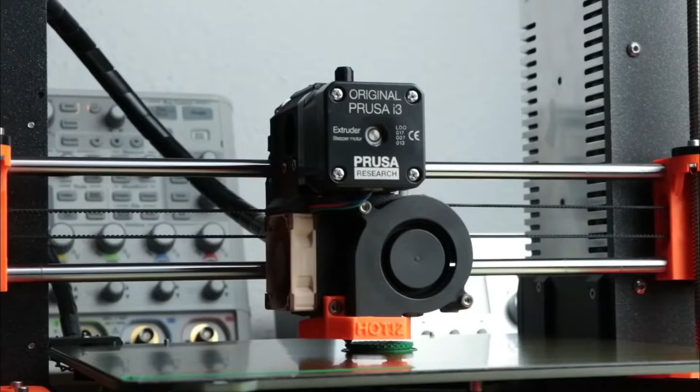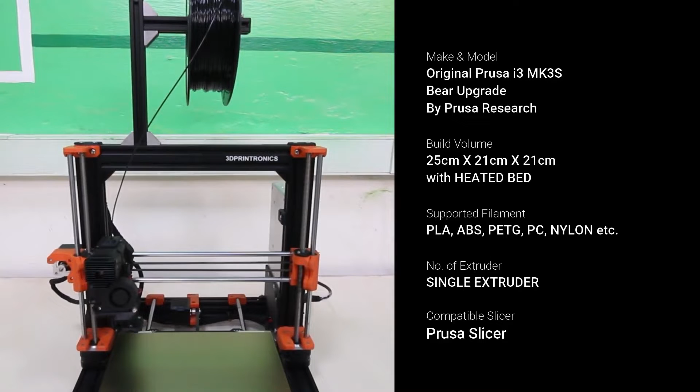This is the original Prusa i3 MK3S by Prusa Research. With a build platform of 25 by 21 by 21 centimeters, this open source printer is capable of printing with materials like ABS, PLA, PETG and more.

In this video, we will learn how to use the 3D printer. This comprises of two parts: one, slicing a digital 3D model in a Slicer program, and two, printing the model in the 3D printer.

Slicer is a program that converts digital 3D models into printing instructions for a 3D printer. A 3D model can be designed in a CAD software like AutoCAD, Rhino, Fusion 360 and SolidWorks. Once the model is made, export it into 3MF or STL file format.

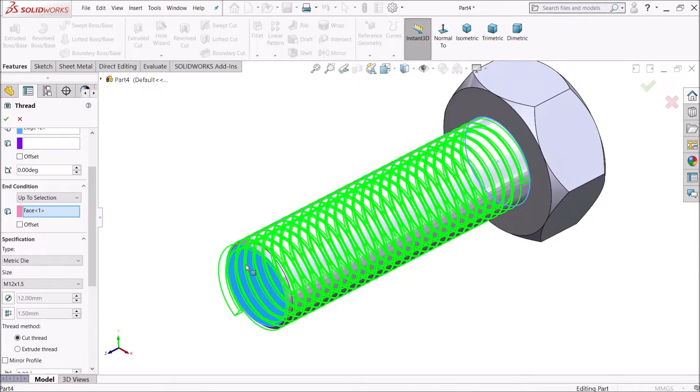If you are learning to use a 3D printer and you don't have a 3D model, you can simply download ready-made 3D models from online platforms like Thingiverse, MyMiniFactory or Pinshape.

We are using Prusa Slicer here. You will find Prusa Slicer already installed in Makerspace computers.

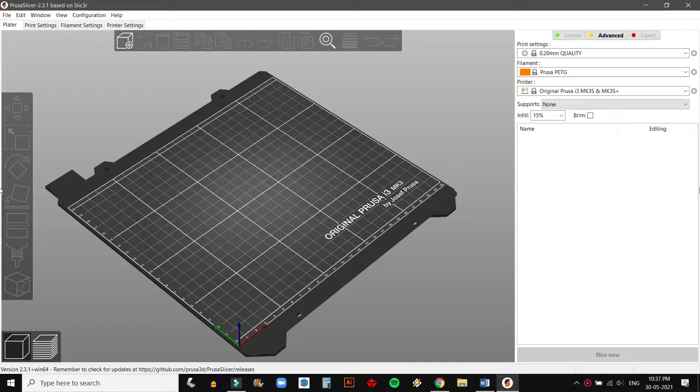When you open Prusa Slicer, it greets you with an empty workspace. This represents the heat bed of the printer. You can use the mouse to change viewing angles.

Go to File to import a 3D file here. You can also use the shortcut Ctrl+I to do the same.

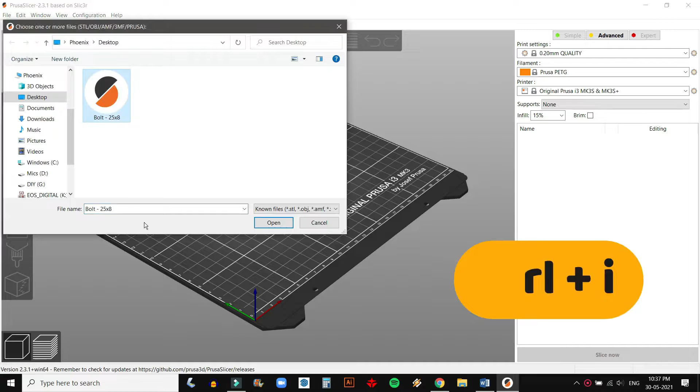Now that the file is imported, we need to do print settings in the slicer. On the right of the screen, you can see different settings.

Print settings: a 3D printer prints one layer at a time all the way to the top of the print until it is completed. So the smaller the layer height, the more detailed the print. It also results in increased printing time. If you want ultra detail, select 0.05 mm, and if you are not bothered about details of the print, select 0.30 mm or draft. If unsure, you can stick with 0.20 mm quality.

Filament settings. If you click the drop down, it will open a list of different brands and types of filaments which you can select from. We want to print in Prusa PETG filament, so the printer is loaded with the same filament and the same filament is selected in the settings as well.

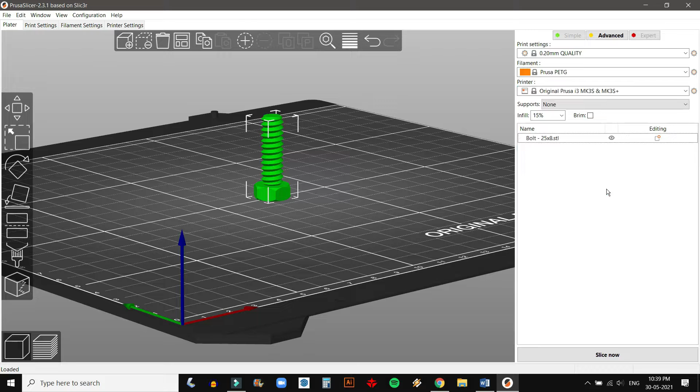Now it is important to select the right material. What this setting actually does is automatically set printing speed, extruder temperature and heated bed temperature according to the filament. So if you select the wrong filament, the print won't come out well.

Printer settings: we are using the original Prusa i3 MK3S, so this is set to the same.

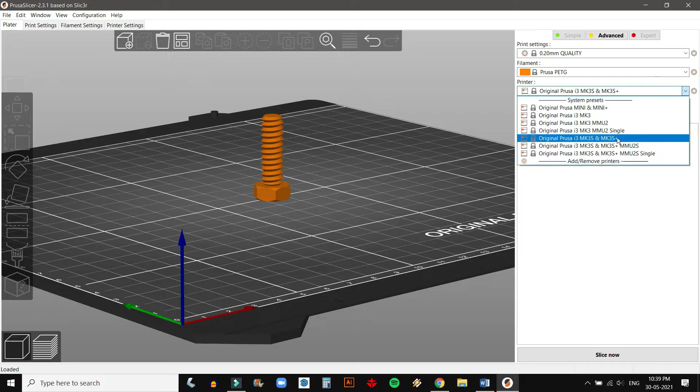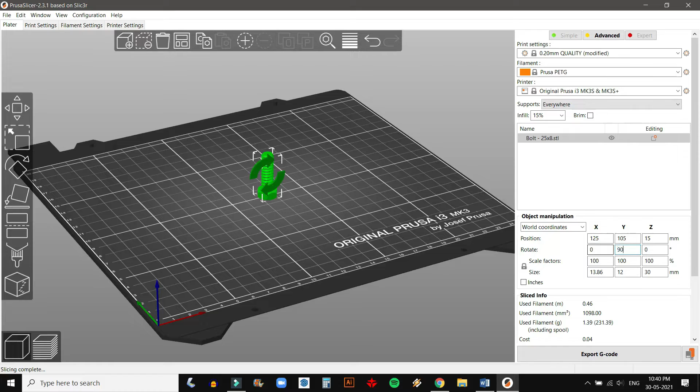Supports. When a 3D model has an overhang or a bridge which is not supported by anything below, you may need to use a support structure to be able to 3D print it. It also depends on the orientation of the model. This model doesn't require a support as it doesn't have any overhangs, but if we change its angle, this part doesn't have any base to print on.

Now if we select support everywhere, it will add the required support itself. The greens are showing the support. Supports can be later removed from the print once it is completed.

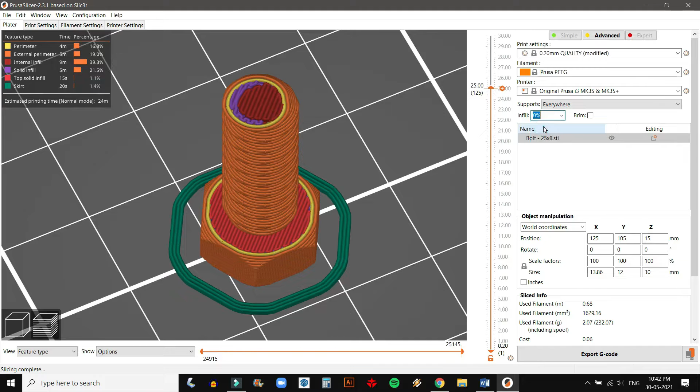Infill adds structural strength to the model. If infill is 0%, that means the model will be printed just like an outer shell with no material inside. Infill percentage can be decided considering the application of the print. If it's a decor item, we can go for a lesser infill percentage, while if it's required for mechanical function where strength is needed, go for a higher infill percentage.

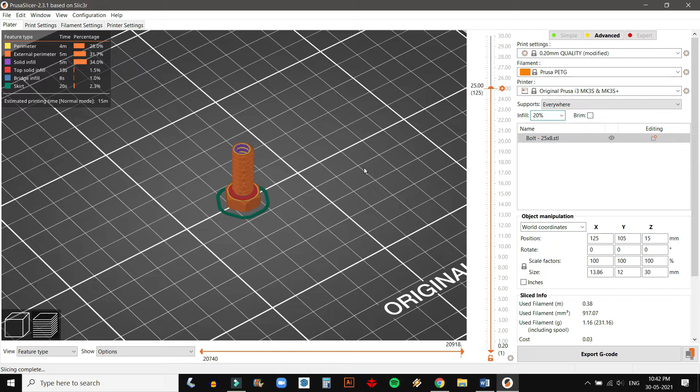This is object manipulation. Here we can set orientation and size of the model. And that's all about basic settings. Click on Slice now.

Here we can see the amount of filament to be used in length and weight with estimated printing time. Now export the G-code and send it to the SD card.

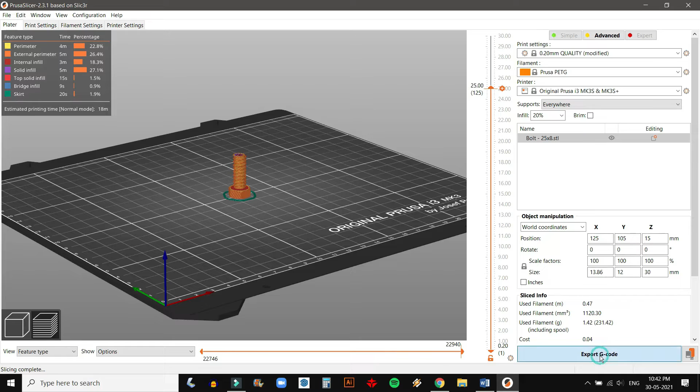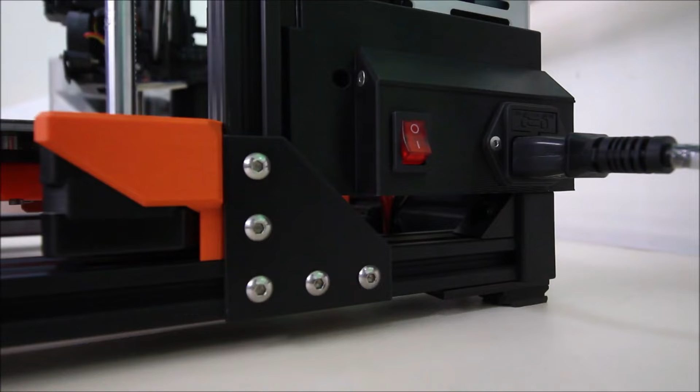Let's start printing. Turn on the main switch located in the rear right of the printer.

Insert the SD card upside down in the slot. Use the knob to select the file and press it to start the print.

The printer will start heating up the bed and the extruder. On display you can see print information: this is extruder temperature, bed temperature, status of print and remaining time.

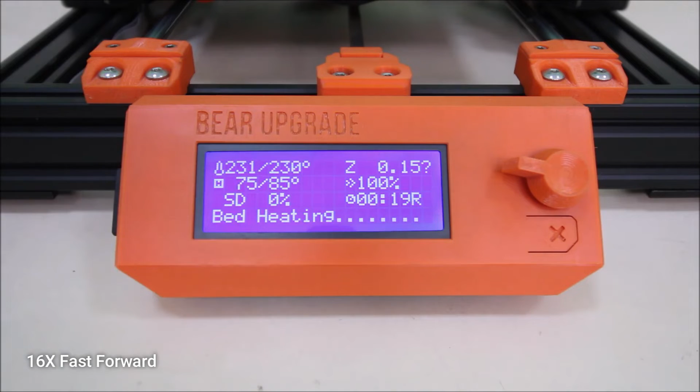Once the printer is ready, it will start with mesh bed leveling, make an intro line and start with the print.

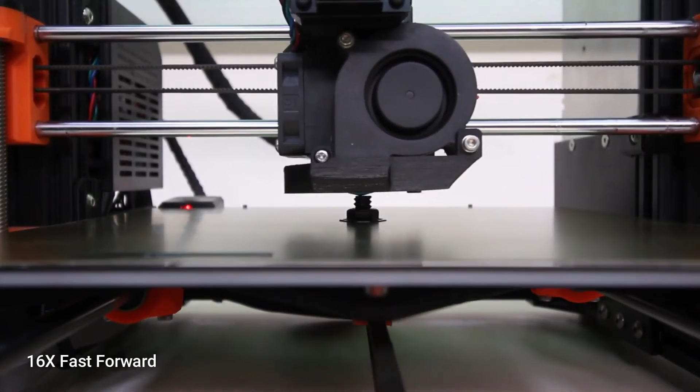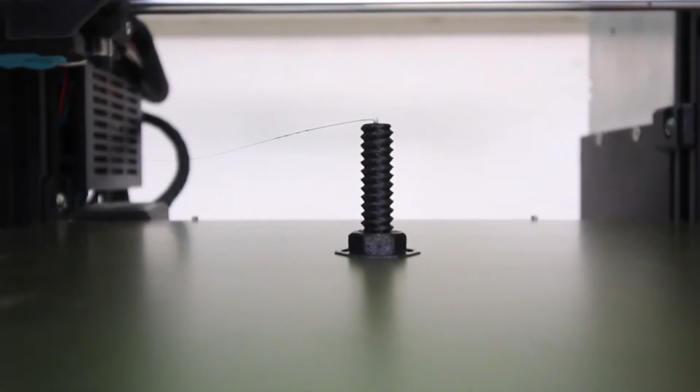Once the print is complete, wait for the temperature of the bed to get down to at least 50 degrees Celsius before touching the bed.

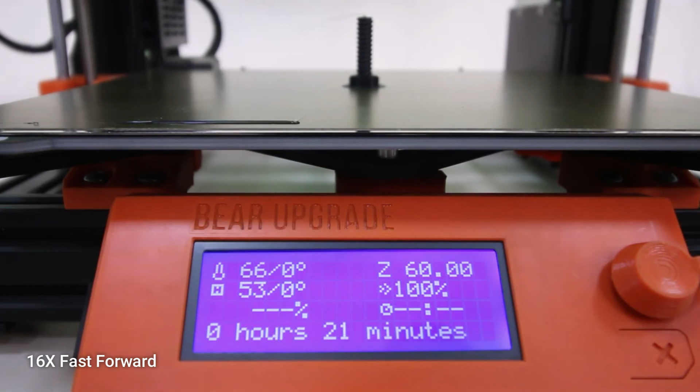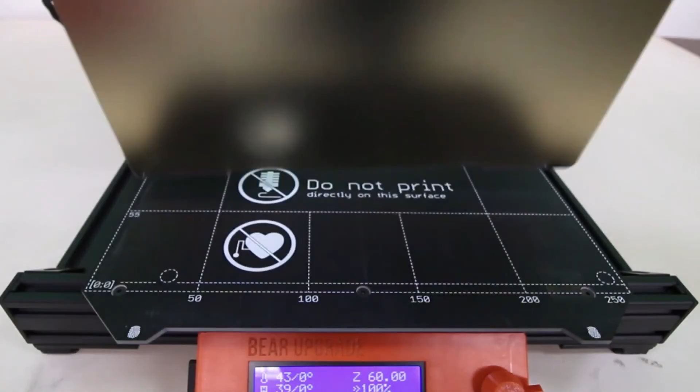This is a spring steel plate fixed magnetically. Lift it from here and pull it out of the printer. Now bend it a little to loosen up the print and remove it. Also remove the intro line and print remainings from the bed.

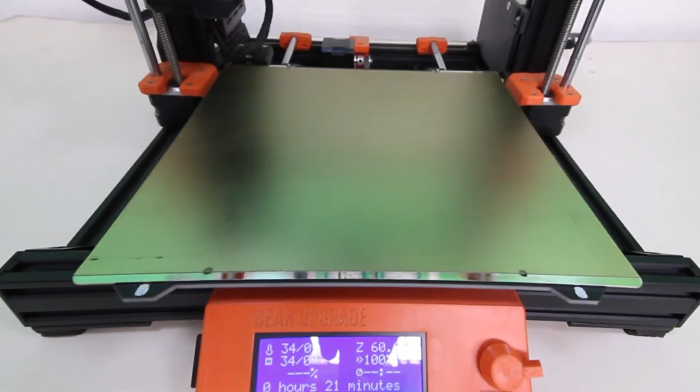Place it back on the printer with the right orientation. You are welcome to use this 3D printer in IIT Delhi Makerspace. For any doubt, you can take help from Makerspace staff present in the facility.